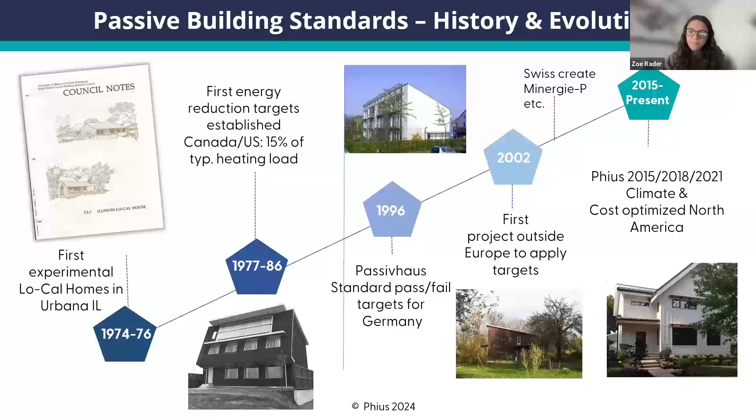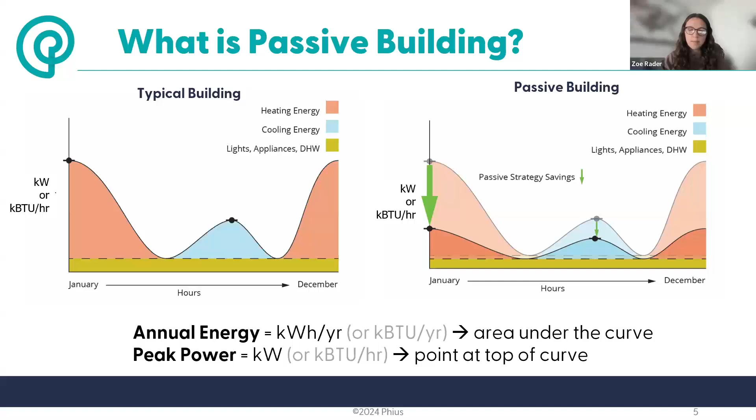So what does passive building deliver? Passive building helps to deliver safety, a healthy interior, a comfortable interior environment, long-term affordability, durability, and resilience.

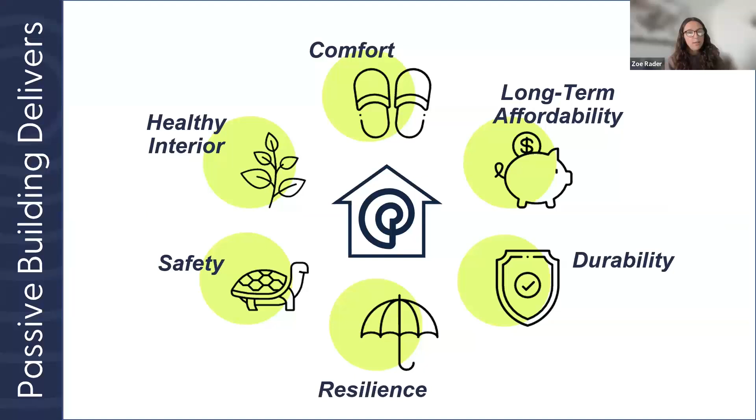So the next few slides are an overview of the critical elements of the passive building method. The top half of the circle, highlighted in orange, outlines the primary passive building principles that will be covered in the next few slides. The bottom half of the circle, outlined in blue and green, will outline more advanced tools and concepts that are considered in this process.

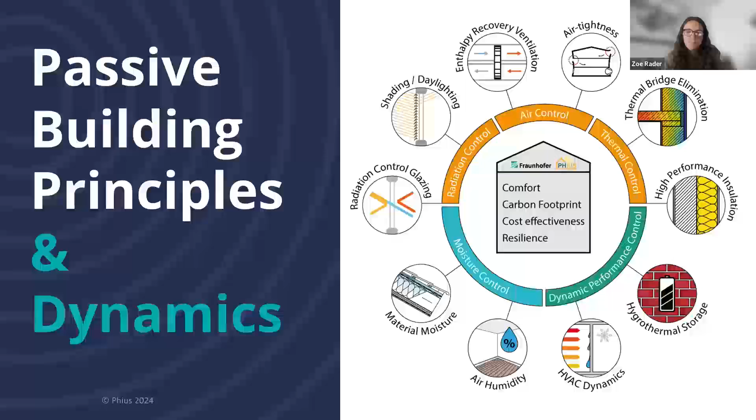Passive building principles break down into thermal control, air control, and radiation control. With thermal control, we have high performance insulation and high performance enclosure, so we're looking for an over insulated envelope. Especially in the Midwest, it's really common to see 2x6 stud framing with cavity insulation and exterior continuous insulation on the outside as well. We're also looking at thermal bridge elimination - where is that insulation interrupted, and how can we mitigate that?

When it comes to air control, we're looking for airtightness. Airtight construction creates a controlled environment that supports balanced ventilation and heat recovery - these go very hand in hand. That's where enthalpy recovery ventilation, also known as energy recovery ventilation, comes in. Because we have this super airtight building, we want to make sure we're getting all the good air in, and all the bad air out.

Finally, we have radiation control. We're looking at window placement, glazing, solar heat gain, shading strategies and solar control. As a result of all of these principles, the heating and cooling mechanical equipment can be minimized both in sizing and in distribution.

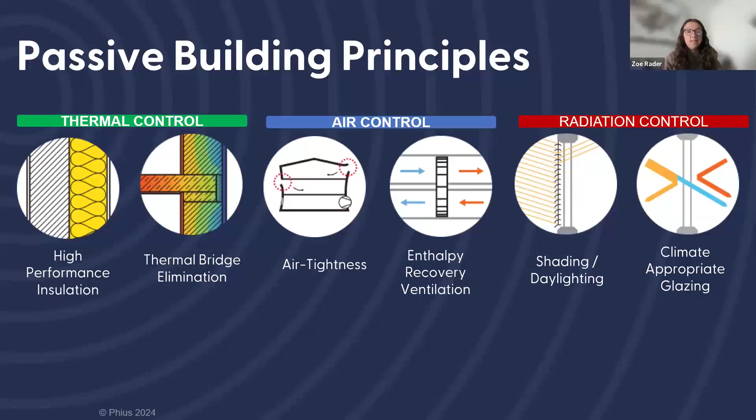First we have continuous insulation. Building codes dictate our minimum R values, insulation levels for buildings, and passive building uses energy modeling to determine the right amount of insulation to meet conservation goals.

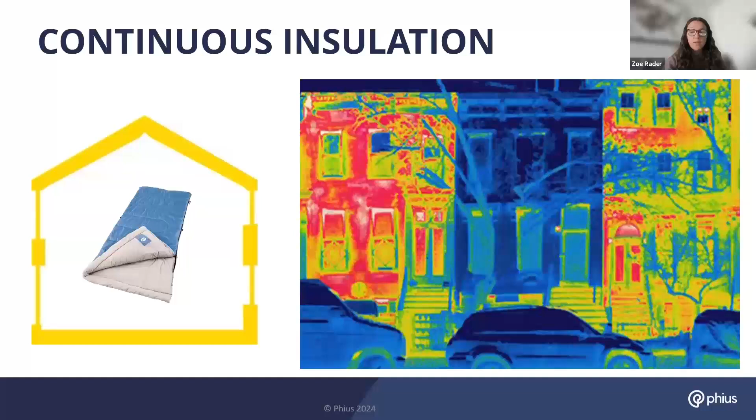This infrared image on the right shows row houses where only one unit has been retrofit to the Phius standard. Where it's dark and red, you can see a lot of heat fluctuation, whereas the center one, the Phius unit, is over insulated, so there's not as much heat transfer there. The red, yellow, and orange represent rapid heat loss, while blue and purple represent little heat loss. The resulting Phius certified envelope demonstrates a continuity of thermal resistance.

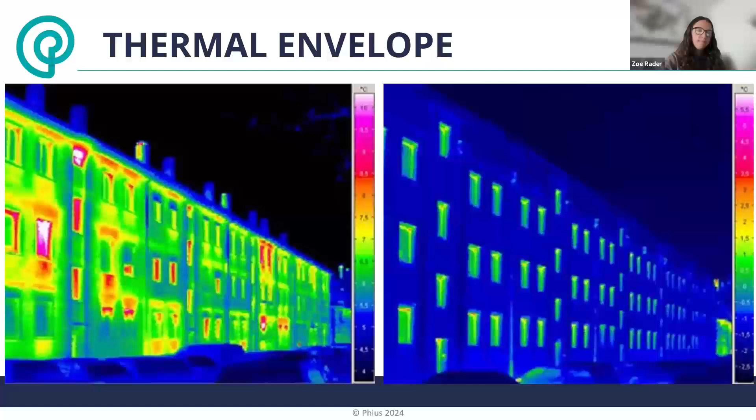Now we have controlled ventilation versus random ventilation. Conventional non-airtight buildings exhibit random ventilation, whereas passive buildings exhibit controlled ventilation. In controlled ventilation, an airtight building envelope ensures that the air exchanging between inside and outside is only from intended locations - where do you want this ventilation coming from, where do you want it going to. Whereas in random ventilation, it's impossible to predict air infiltration; air comes in through leaky parts where the floor meets the wall or where windows aren't installed properly, and that's also where your good air gets out. So controlled ventilation increases the need to bring in fresh air mechanically from the outside.

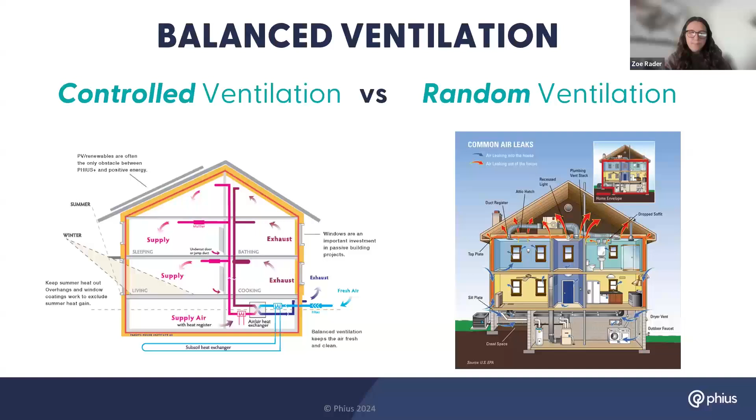Heat recovery ventilation is essential for passive buildings. This reclaims heat from the exhaust air on its way out and uses it to pre-treat incoming fresh air. Energy recovery ventilation regulates humidity in addition to heat, while HRVs do not. So more often than not, in the Midwest, you're almost always going to have an ERV - we're a pretty humid area, so we need that ventilator to recover humidity as well as heat. By using an ERV or HRV, less energy is needed to heat or cool the interior spaces.

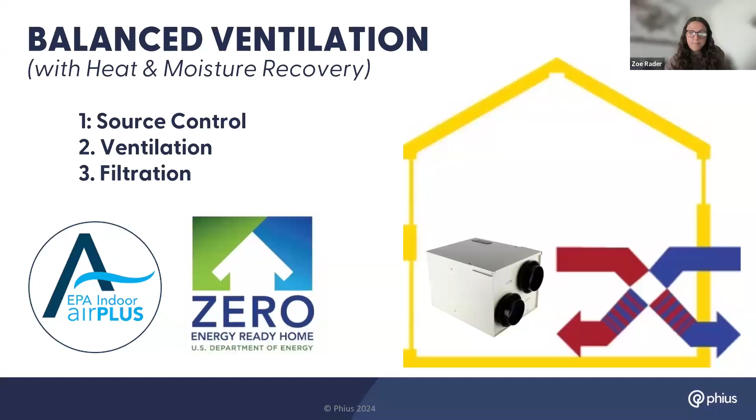Airtight construction. The building envelope should be airtight continuously around the building, including the building slab. Phius certification airtightness limit is 0.06 CFM per square foot, and it's 5 times lower than what is required by the building code.

Airtightness provides durability in assemblies, supports balanced ventilation, and reduces heat loss through infiltration. Having this airtightness means your building's just not going to be as leaky, which in turn means your HVAC systems aren't going to have to work as hard because they only have to heat and cool the actual interior air. You don't have to worry about heating the outside.

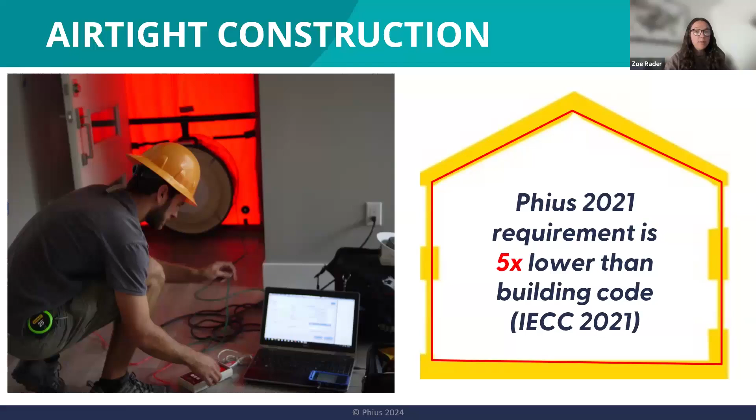The device in this image is called a blower door test, and this can pressurize or depressurize a building. The resistance to the pressurization measures the amount of air leakage through the walls, through the roof, through the floor. It's one of these tests that determines if that 0.06 minimum requirement is met.

Now we have optimized windows, referring to the correct balance between heat loss through the window and heat gain through sun exposure. This is specific to your climate, specific to your building type, and specific to the orientation. Windows account for the largest amount of heat loss per square foot in a building.

It is possible to achieve Phius certification with both double and triple pane glass, though historically triple pane is used much more often. The thermal analysis diagram on the bottom left shows various mullion profiles and shows the efficiency of a thermally broken frame. Red equals warm, yellow equals cool, so we're looking for one that's more in that yellow area.

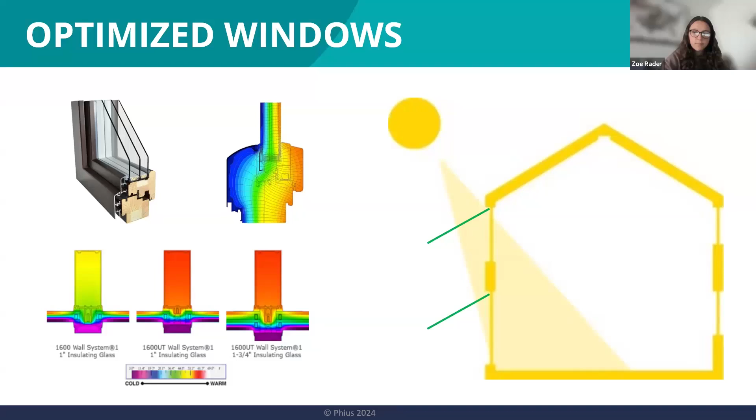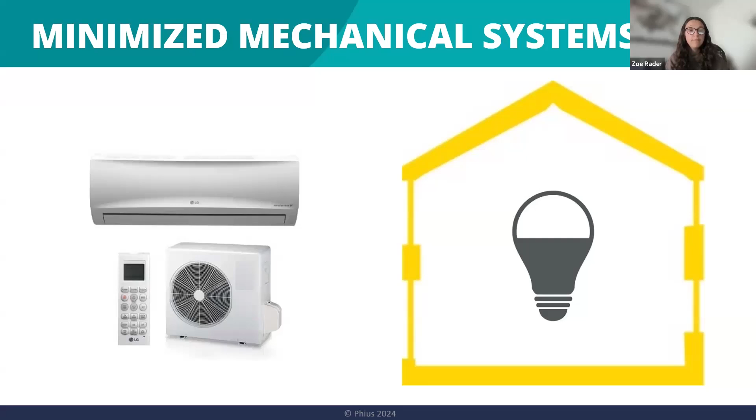So in the previous slides, we were looking at the 5 foundational principles of passive building. In the next few, we're going to focus on the way Phius optimizes these characteristics to provide a cost-optimized, climate-specific roadmap to certification.

The Phius standard is a climate-specific passive building standard that prioritizes passive building principles and guides builders to success in the design and construction of high-performance buildings. It provides a quality and conservation first framework for net zero building.

There are four main certification requirements: space conditioning targets, which are climate specific, airtightness, which is the same no matter what, on-site quality assurance, and the final one, source energy target.

The space conditioning targets, annual and peak demands, are variable based on your climate, based on your building size, based on occupant density, and the dwelling unit size, and then financial investment, upfront cost versus operational cost.

The net source energy target varies based on the program level. Are you going for Phius Core? Or are you going for Phius Zero? If you're going for Phius Zero, then source energy has to meet zero.

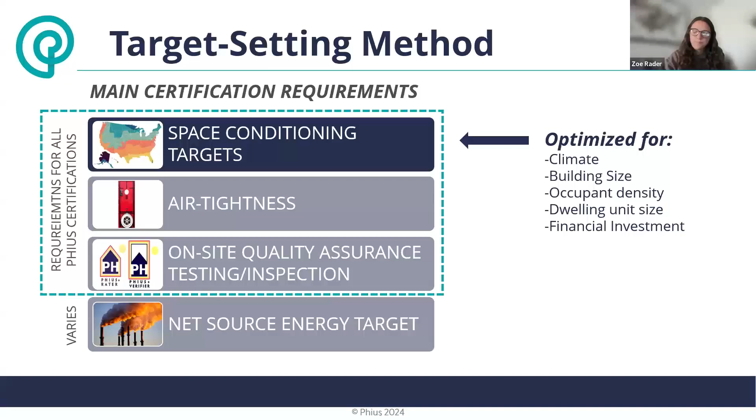Space conditioning targets were set using cost optimizing and pinpointing the sweet spot for investment and conservation. More and more insulation can be added to the building, but there will always be a point of diminishing returns when looking at upfront cost versus operational cost, i.e. electricity use.

The sweet spot is the maximum amount of investment in conservation before the point of diminishing returns is hit. So the next conservation measure may save energy, but it will increase the total cost. The total cost is the cost of upfront savings measures plus the cost to operate the building, annualized for the life of the building. Ideally, you want to minimize this.

Phius has over 1,000 individual climate sets with unique design conditions across the continental US and beyond. The cost optimization exercise is then applied to various climate zones and various building types and sizes to determine the Phius design targets.

So you could plan for a single family home on the same exact site, at the same exact address, as a multifamily building, and those targets are going to come out differently just because of the size of the building. Or you could have the same exact single family home that you want to put one in Texas and you want to put one in Montana. Those are going to have different targets based on different climates.

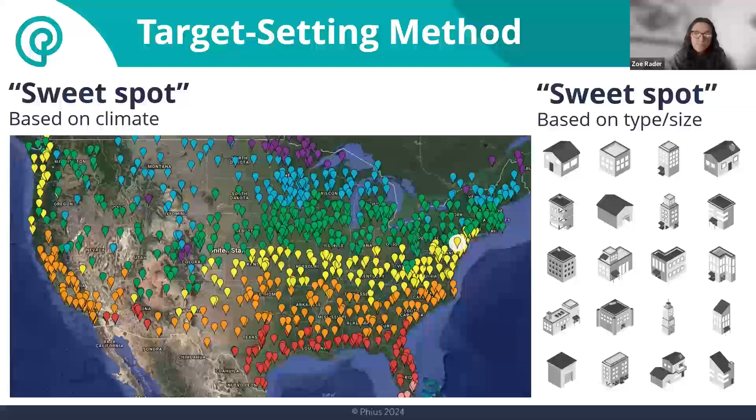Phius now has active projects in Canada, Japan, and Thailand. If there's not an existing climate set that's appropriate for your building, Phius can and often does create custom climate sets for these sites. In addition to the climate-specific space conditioning targets, Phius certification ensures the highest quality building envelope.

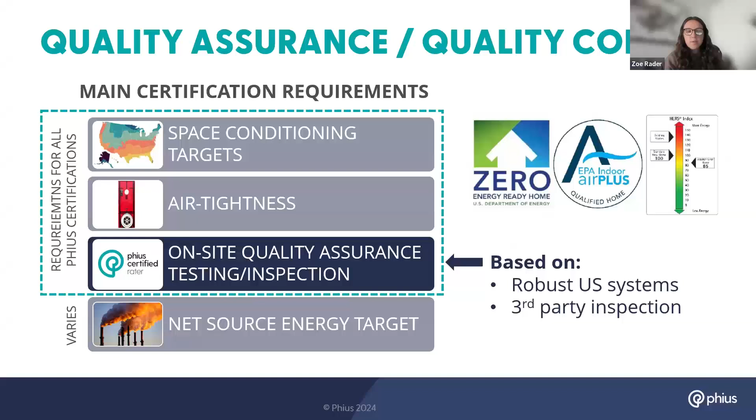Phius quality assurance and quality control is based on existing US certification systems and third-party inspection of a Phius rater. This is where our partner programs come in, where we look for Zero Energy Ready Home certificates, Indoor Air Plus certificates, Energy Star, and HERS ratings. We have the US Department of Energy high performance staircase, which backs all the way down to IECC 2006. As you work your way up, once you're at the top level, everything below is already combined. So if you're just looking at the DOE ZERH version 2 step, everything below that is encompassed within it. By the time you reach Phius Zero, you have also reached Phius Core, ZERH, Indoor Air Plus, Energy Star, all the way down to IECC 2006.

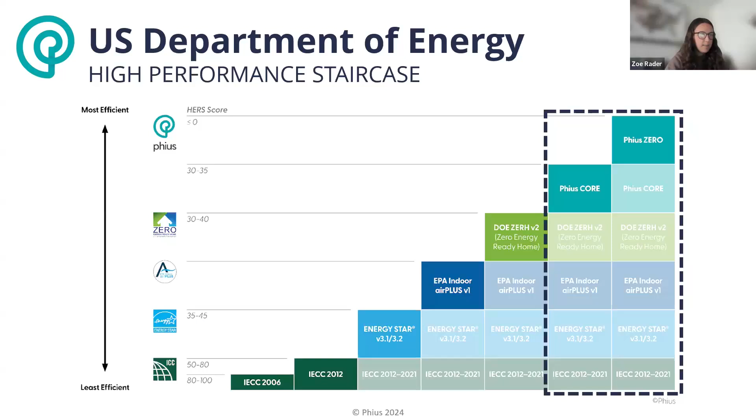Passive building focuses on passive measures and is the essential first step towards net zero buildings. The following slides present the concept of net zero energy and relate that concept to Phius certification.

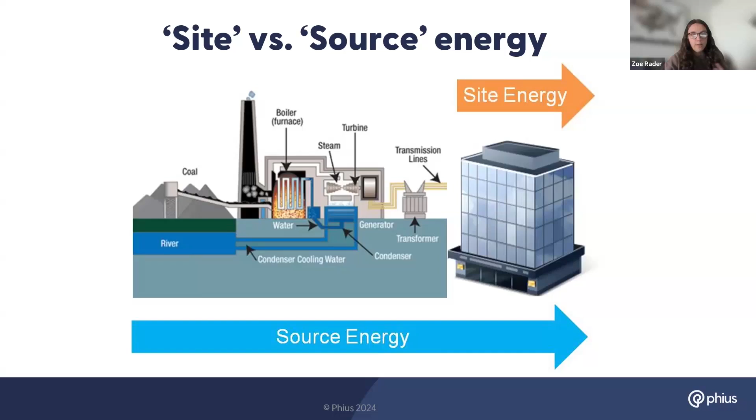Site energy includes only the energy consumed on site - that is lighting, heating, cooling, ventilation, hot water, plug loads, appliances, et cetera - whereas source energy includes the site energy, but it also includes the energy that it took to produce and deliver the electricity from point A to your building. So Phius focuses on source energy instead of site energy so that we can encompass all of the energy it took to get to this final product.

As mentioned, Phius focuses on source energy, not just site energy. But the final certification requirement is a net source energy target. The net is net of renewable energy production, all of which is offset for zero, but only some of which is counted for in Phius Core. So source energy targets are set differently based on residential or non-residential project. Residential is based on a per person limit, which varies based on the Phius certification selected, Phius Core or Phius ZERO.

Commercial and non-residential is a per square foot limit. This differs just because we can look at how often somebody is in their house, and we can make assumptions based on that, whereas it varies for commercial and non-residential projects, depending on what type of non-residential project it is. So with that one, we go by a per square foot limit.

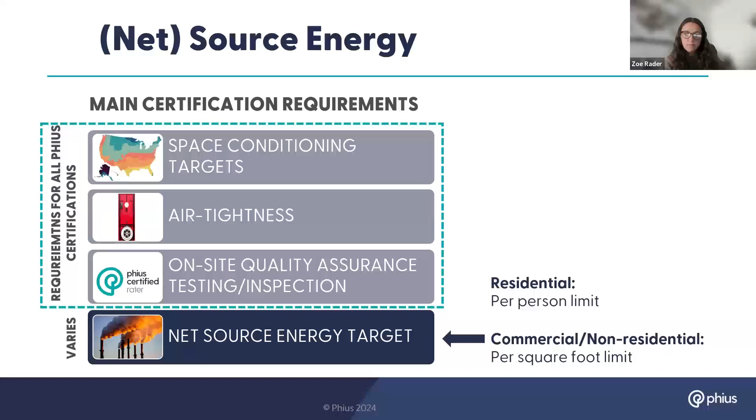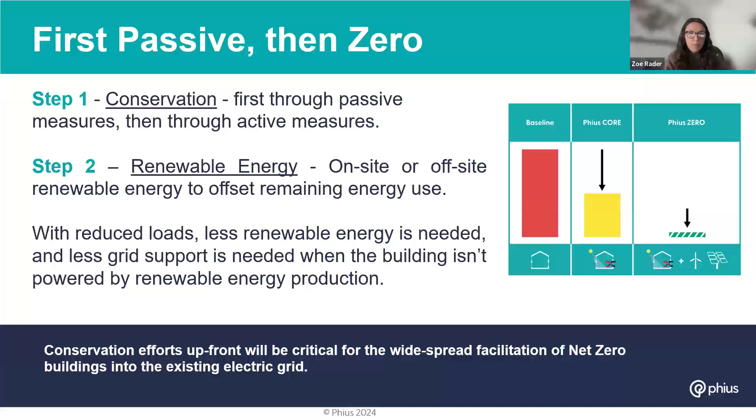Phius stresses a conservation first approach to net zero. This is important when considering the impact of building beyond the building site boundary into the electric grid. Step 1, conservation, first through passive measures, then through active measures. This kind of goes back to: what does your building enclosure look like? And then how can you offset your uses for your mechanical equipment? And then renewable energy, on-site or off-site, to offset the remaining energy use. Note that on-site renewable energy is the most common with Phius.

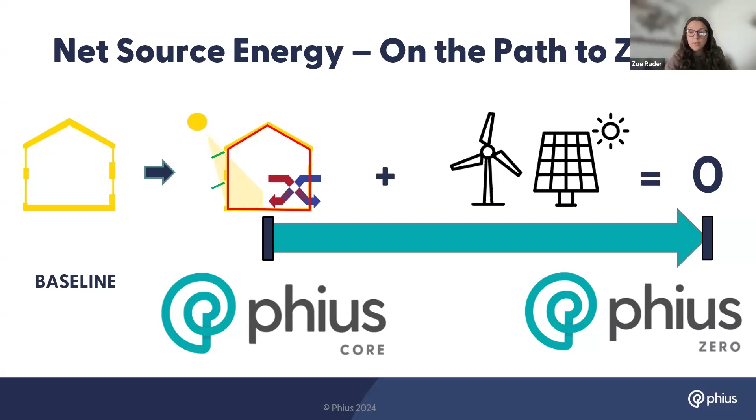Phius Core is based on a per person net source energy reduction based on a global fair share principle. Phius Core focuses on the foundation passive building principles, but only requires renewables if the fair share source energy target is not met. Phius ZERO is based on a net zero energy consumption per person - total renewable energy production equals or exceeds the total energy consumption. Phius ZERO always requires renewable energy and is compatible with all renewable energy sources on or off site.

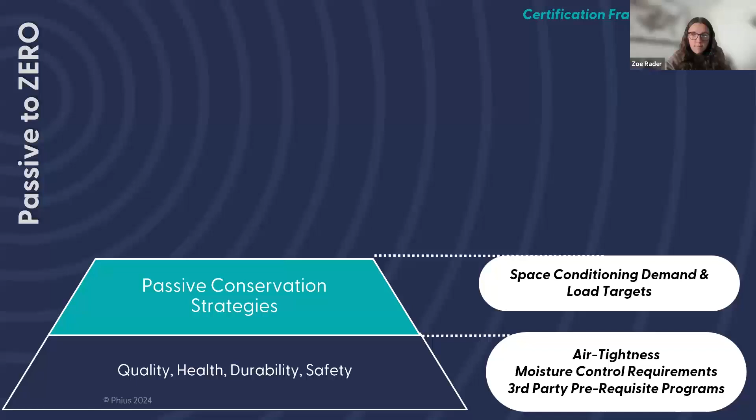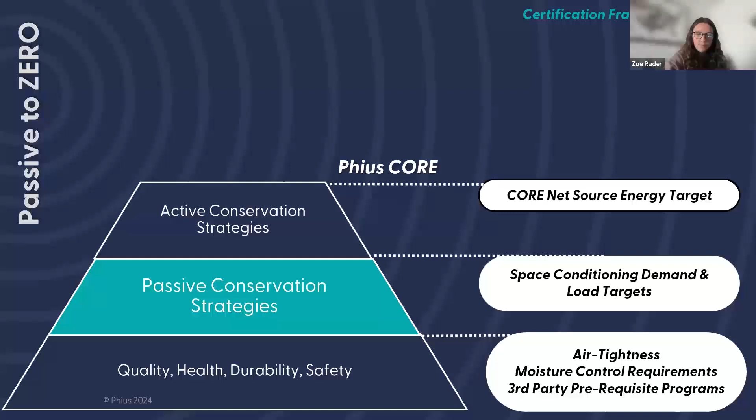The Phius certification framework is intentionally structured to prioritize: first, quality, health, durability, and safety are met with airtightness and a robust third-party quality assurance program. Then turn to passive conservation strategies and meet the space conditioning, demand, and load targets. Then focus on active conservation strategies, more efficient equipment, to meet the Phius Core target. And after the conservation strategies are applied, then turn to renewable energy to offset the energy use.

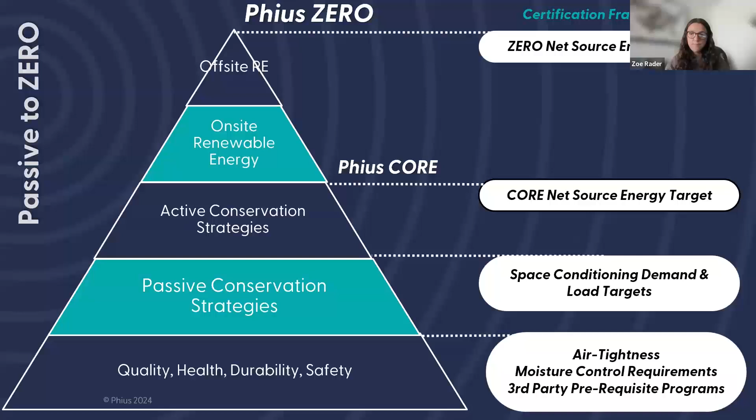A new alternate approach for Phius Core: in 2021, Phius released a new prescriptive path to streamline adoption of passive building. The scope is limited to all electric single family homes.

Similar to the performance path, the core framework aims at quality, health, durability, and safety, targeted with the same requirements as the performance path: airtightness and a robust third-party quality assurance program. Passive conservation strategies are targeted with individual measures per component, like a prescribed wall R value or window U value. Active conservation strategies are targeted with individual efficiency requirements on appliances and equipment. Renewable energy is not credited in the prescriptive path, though it can be used. This path uses a different approach to achieve the same goal—a conservation-first approach to net zero.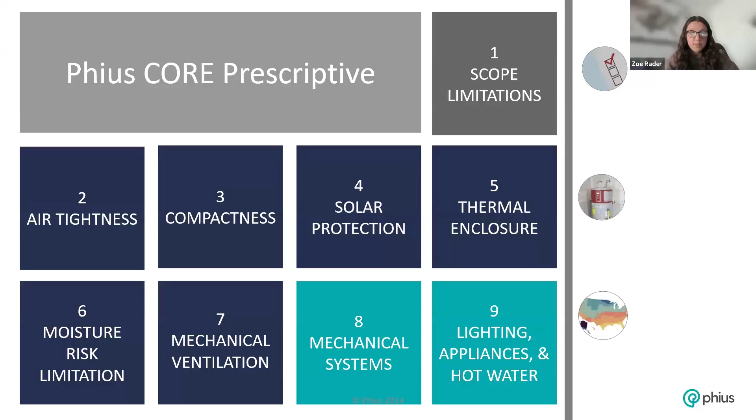The snapshot tool is used to display the Phius prescriptive path requirements that are climate specific. All other requirements are outlined in the prescriptive checklist, a free tool found on our website at phius.org. This snapshot produces recommended R values, window values, and minimum mechanical efficiencies based on the location, size, and occupancy of your project. While this snapshot was developed for the Phius 2021 core prescriptive path, it's also a really good starting point for anyone looking to do a Phius project.

The difference with prescriptive versus performance is that with prescriptive, the minimums laid out have to be met for the wall, the floor, the roof, windows, mechanical equipment, etc. Whereas in performance, these minimums are likely going to be overperforming, so maybe you can pull back—you don't have to have quite as much insulation in your roof, or you can have better mechanical equipment that allows you to use a little less insulation, or vice versa. So just know that with prescriptive, the minimums just have to be met.

The next slides will identify the key project certification players and tools.

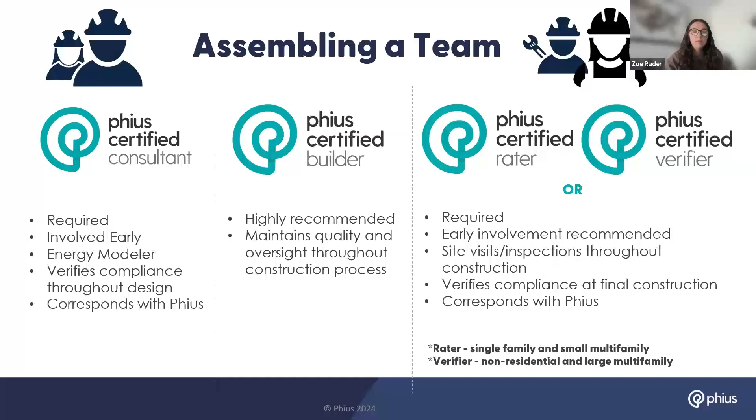Each of the team members should be familiar with the critical certification guidelines. These include moisture control for walls, roofs, and floors, comfort assessments for windows, and design requirements for ventilation and heating and cooling systems, etc. These guidelines provide another level of quality assurance to provide the highest quality building we can possibly achieve.

WUFI energy modeling software is an essential part of design certification. WUFI provides whole building energy simulation to determine the building's specific annual heating and cooling demand, and it verifies those against the Phius targets as well.

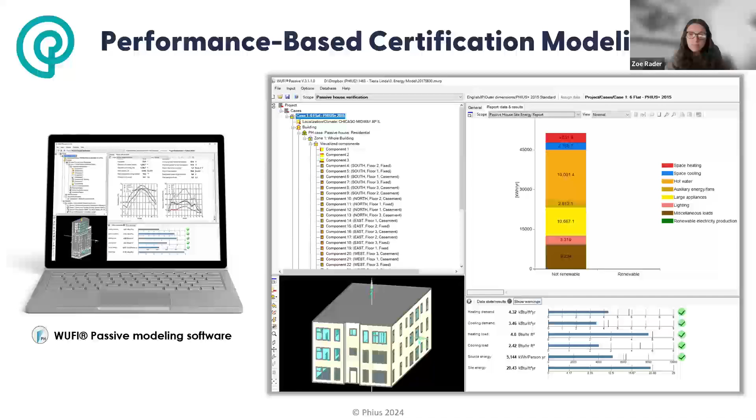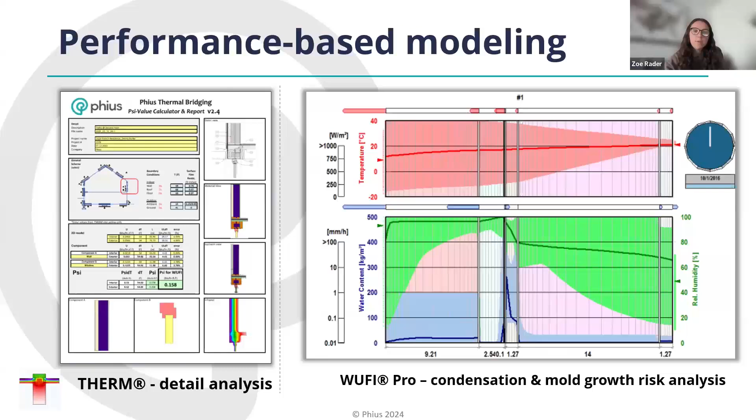The next slides will provide a complete overview of the certification process. Phius certification is divided into two different stages: design certification and final certification. Design certification ideally occurs before the building has been constructed and verifies that all performance and prescriptive targets are satisfied.

Final certification occurs during construction, and the Phius rater or verifier will verify that the project was built as designed. This goes back to the QA/QC process we have, where we want to make sure that the really energy efficient building that was designed is the same energy efficient building that was built.

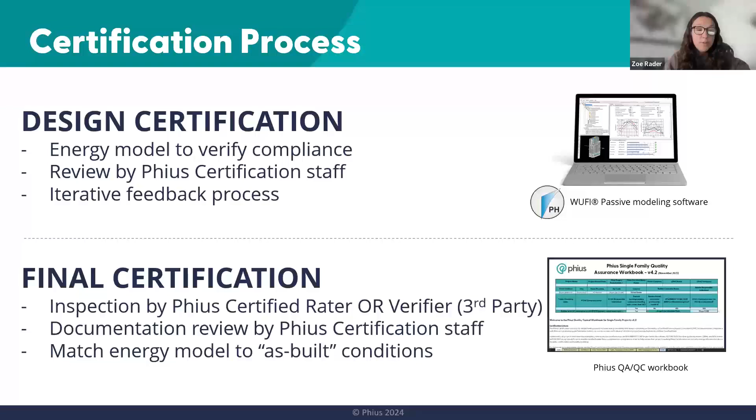So phase 0, we have a feasibility study. This is recommended for projects before committing to the certification contract. This is essentially where you have the very basics of a design. You want to know how feasible is my project for Phius certification.

So you can go on our website and submit for a feasibility study, and Phius will create an energy model based on usually very schematic drawings provided by the project team. And then we create a Phius version of that project.

So 9 times out of 10, that original schematic design is not meeting the targets. And so we give our input based on assembly types, insulation types, mechanical systems, etc., and how to best make that project meet targets.

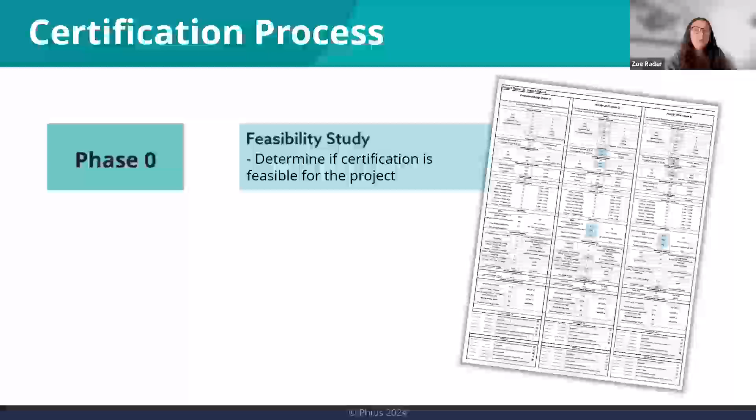And so these can be completed by Phius specifically, or if you have access to a Phius certified consultant, sometimes they will do a feasibility study as well.

Phase 1, we have paperwork. We love paperwork. When the project team determines certification is feasible, the team should register the project with Phius. This includes signing a certification contract, creating an entry in the project database, and then paying a certification fee.

It's important to note that fees vary by size and by occupancy. So a single family home is going to be cheaper than a multifamily apartment complex, which is going to be cheaper than a really large commercial building.

So once the project has been created in the project database and receives a project number, the design team can then proceed with the design certification process. Ideally, it's much better if design certification is achieved before construction begins.

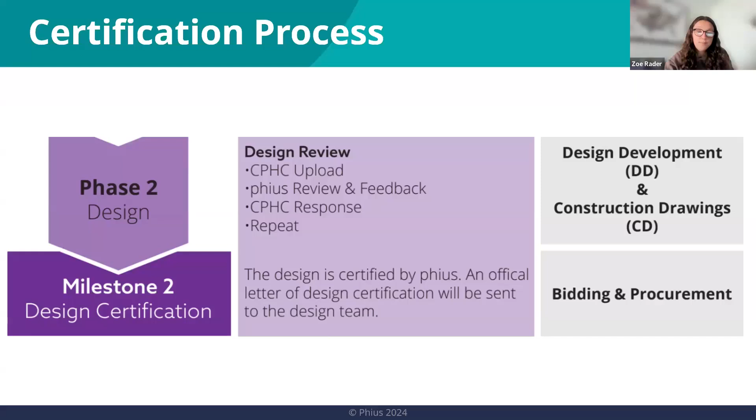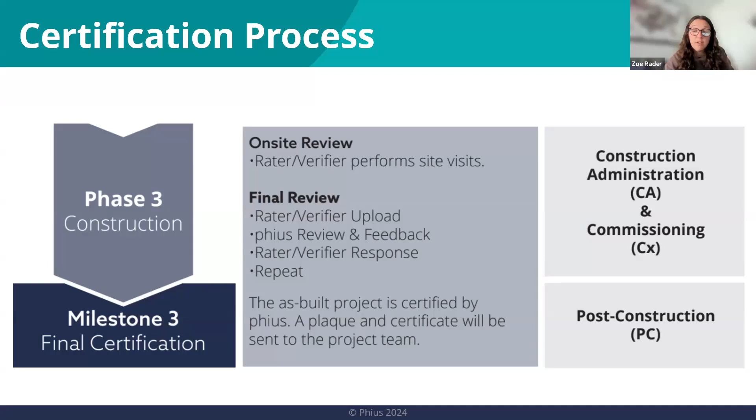During the construction process, a Phius rater will visit periodically to verify the building has been constructed as designed and previously approved by Phius. Final certification can be awarded after construction is complete, and then all documentation has been verified by the Phius certification team.

Phius certification is growing rapidly throughout the US and beyond. As of January 2023, Phius certified 3.4 million square feet of building floor area. And as of March 2022, Phius has now over 350 projects enrolled in North America.

And now we have some resources and training. The biggest one here is the Phius certification guidebook. We have it set out into 4 overarching sections. Section 0 is about building certification.

Section 1, new construction performance path. Section 2, very similar, but it's the prescriptive path. So instead of talking about WUFI and energy modeling, we're talking about that prescriptive checklist. And then section 3 is retrofit, Revive 2024 standard.

And then we have our list of appendices here, where a lot of really specific information can be found. I would say the biggest and most visited is probably Appendix B, and that's where we lay out our prescriptive

set for opaque assemblies and the moisture control guidelines. So we have that set out for walls, roofs, floors, because we don't want our buildings to mold.

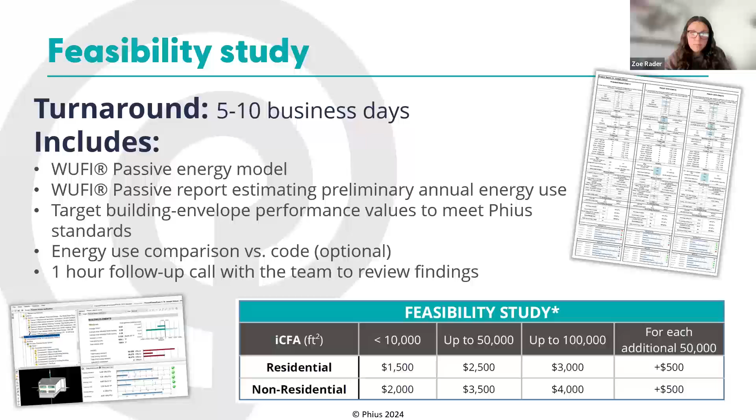A recap of our training: we have Phius certified consultants, builders, raters, and verifiers. The consultant and the builder, there's no real prerequisites there. You can take these trainings as you see fit. But to become a Phius certified rater or verifier, you must be an active RESNET HERS rater. And you also need this HERS rater designation to earn the multifamily designation to become a Phius certified verifier.

We also offer WUFI Passive software training. This can be for beginners. You can get a little bit more advanced and focus on single family, or you can do advanced with the multifamily focus. Even if you've used WUFI before, I find myself referring back to these trainings all the time. You're always going to learn something new. I don't know that anyone will ever know all of the ins and outs of WUFI. It's something that we can constantly learn a little bit more about. So I highly encourage the WUFI Passive software training.

And then we have the Phius Alliance. I mentioned this at the beginning. There's likely an Alliance chapter near you. You can become an Alliance member. Some of these benefits include discounted rates on exclusive webinars, our annual conference, the monthly office hours that we host, and the climate data library.